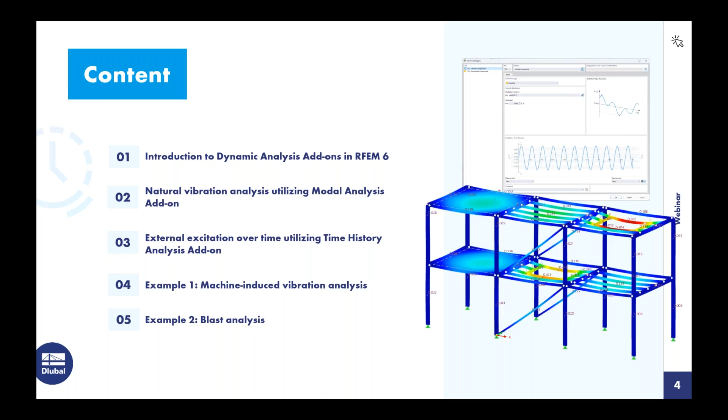So for those of you not familiar with our program configuration, RFEM 6 is the base program that allows us to fully model the structure, where we have access to the materials and cross sections from the various standards. We can load the structure and run a full static analysis. But when you need dynamic analysis capabilities, it will require one of the 4 add-ons listed here.

The first is the modal analysis add-on. So this allows us to calculate the mode shapes of our structures and determine the natural frequencies, periods, and angular frequencies of the structure. So this is a prerequisite for the additional add-ons that you see listed here. The second is a response spectrum analysis. So this is a seismic analysis according to the ASCE 7, the NBC, and other international standards that we offer.

We also have the recently released pushover analysis. This is a nonlinear analysis for seismic deformation behavior, and currently this is according to the N2 method. And finally, we have our linear time history analysis. So this is to introduce external excitations as a function of time. So today we'll be working in both the modal analysis add-on as well as the time history analysis add-on.

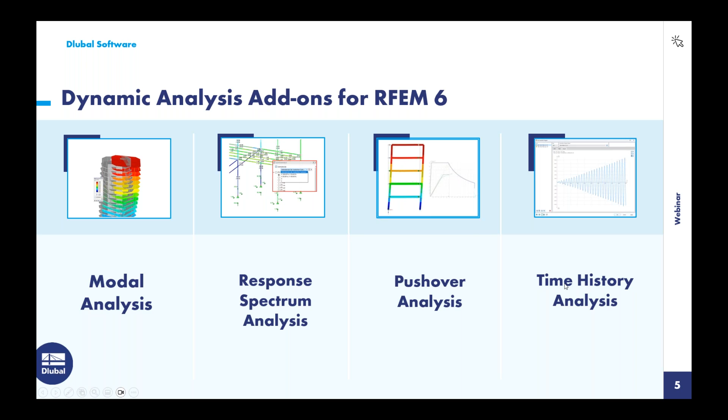So to turn here to the features within the time history analysis, we certainly have improved the integration and the workflow in our new version, RFEM 6. And when we compare this to RFEM 5, it was a little bit of a 2-part process, quite a bit different to open up the dialog box, then to define all of the dynamic time history analysis settings. Now you'll see in RFEM 6 a much more fluent workflow where we can better see that add-on integrated in the main program. We can combine user-defined or function time diagrams with nodal, member, surface, free, and generated loads.

So the point being that we have the ability here to include many different load types in correlation with these time diagrams. We can also combine multiple independent excitation functions for one analysis. We'll see this with our first example today. We do offer the linear implicit Newmark or the linear modal solvers.

And it should be known that currently in the program all nonlinear elements for a time history analysis are going to either be ignored or converted to linear elements. So for example, if you have failure in uplift for a support condition, this will simply be converted to a standard support for that dynamic analysis. Same concept with a nonlinear tension only member. Internally, this will automatically be converted to a truss element. We can consider structural damping with the Rayleigh damping coefficients or the Lehr's damping values.

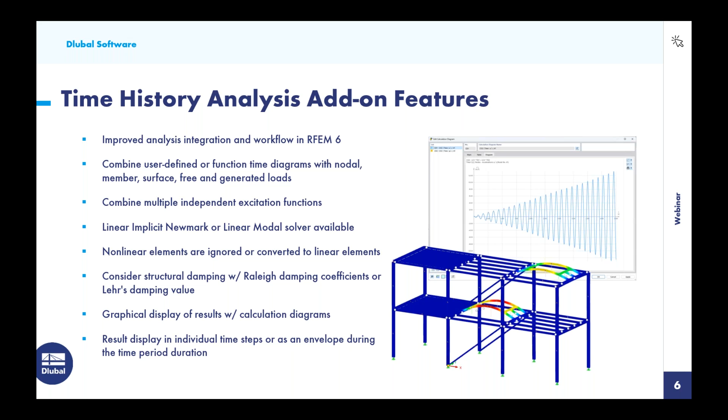So these machines are operating at 325 rotations per minute. The mass of the machine is 2,000 pounds, or converted to 62.16 slugs. The mass of the rotor is going to be 700 pounds, which converts to 21.76 slugs. And the rotor is going to be operating at an eccentricity of 0.75 inches. Therefore, we want to calculate the excitation frequency here.

So we just simply take the 325 rotations per minute, we divide by 60 seconds, and we get a value of 5.42 hertz. So this is a really important number to remember, and will come into play a little bit later on, but just remember this excitation frequency magnitude here. The angular frequency is calculated by simply taking the excitation frequency, multiplying by 2 pi, and we get 34.03 radians per second. And finally, we want to calculate the centrifugal force.

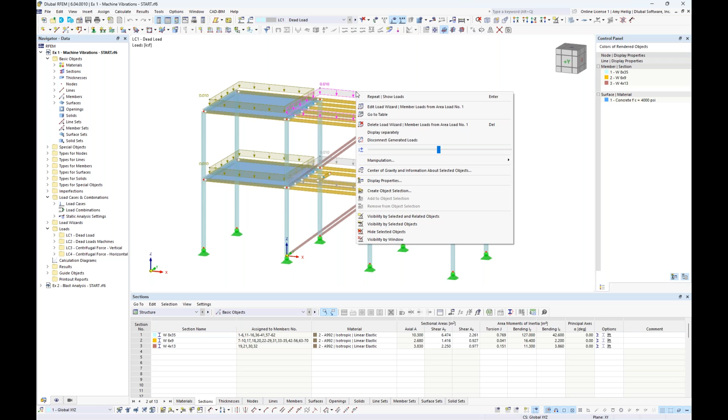So we also have the loads defined. Within the dropdown at the top, I have 4 total load cases at this point in time. We have our dead load, which is automatically going to include self-weight, but notice here that I also have applied an area load. So we have 10 pounds per square foot applied to the structure at both levels. The area load applied over on the right-hand side was used with our load wizard so that we could correctly allocate this to the members based on a one-way area load distribution. So we can right-click to display separately to see those magnitudes here.

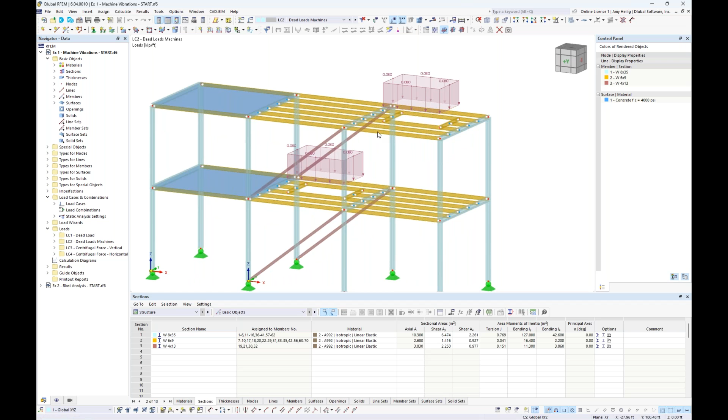Now, in addition to the basic dead load, we also have the dead load from the machine. So this is essentially just the force of the machine sitting on the structure, 0.08 kips per foot. Then going back to the PowerPoint, we have those 2 centrifugal force load cases. So we have load case number 3 here, which is that centrifugal force in the vertical direction. So notice this magnitude 0.047, which again just came directly from the PowerPoint.

If we're curious to know the total length of these members around the opening, we can hold down our control key to select all of these members. You can right click, and under the center of gravity and information, we do see here the total length given to us as 33.6 feet for these selected items.

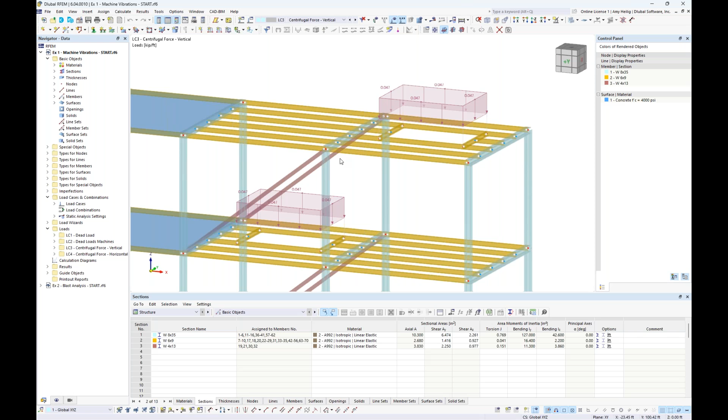So we have the centrifugal force in the vertical direction, and we also have the centrifugal force in the horizontal direction. So identical magnitude here of 0.047, but of course we want it to act in that horizontal position based on the global x-axis here on the structure.

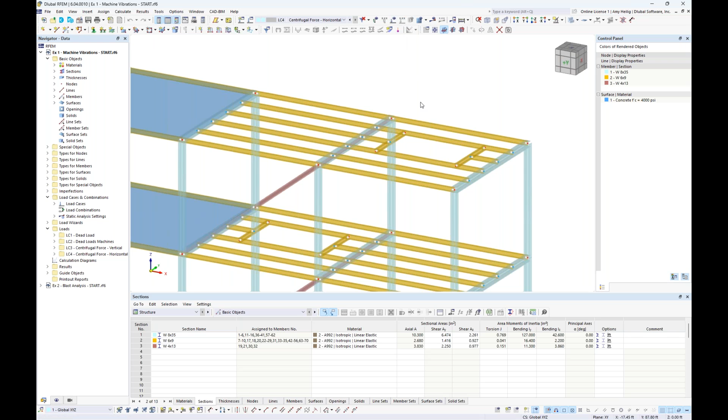So now that we have reviewed the structure as well as the loads, what we would like to move forward with now is our dynamic analysis. And we activate these add-ons by right-clicking here on the model name within the navigator to access our base data. Alternatively, we can launch the base data directly here within our quick tools up at the top.

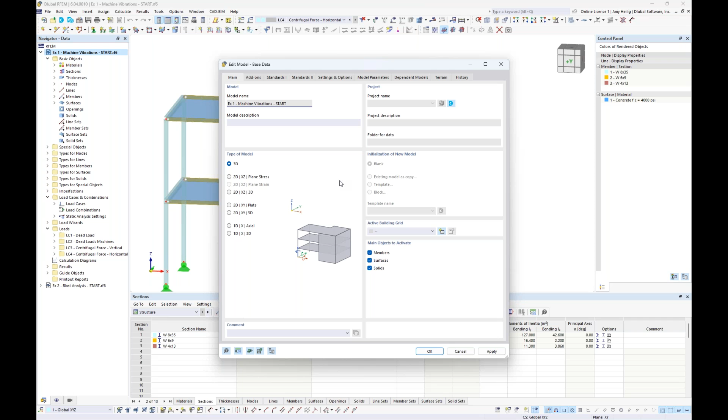So this is the dialog box that would be presented to us when we initially first create the model in RFEM, but we can always access it afterwards as well. Under the second tab here are all of our optional add-ons. So again, RFEM is responsible for the standard static analysis, but we want to activate our dynamic analyses add-ons. And for today, we'll go ahead and turn on the modal analysis and the time history analysis as well.

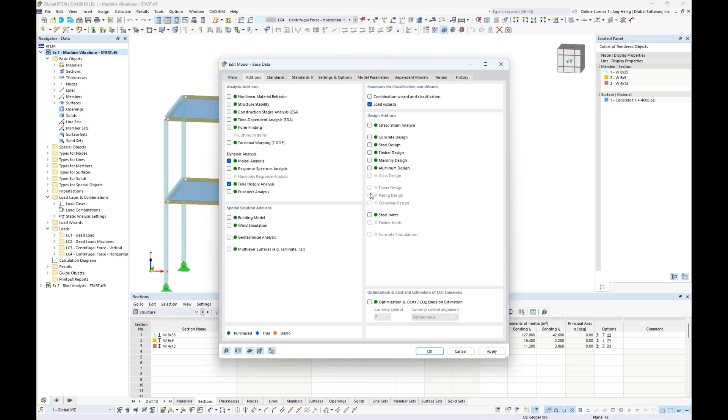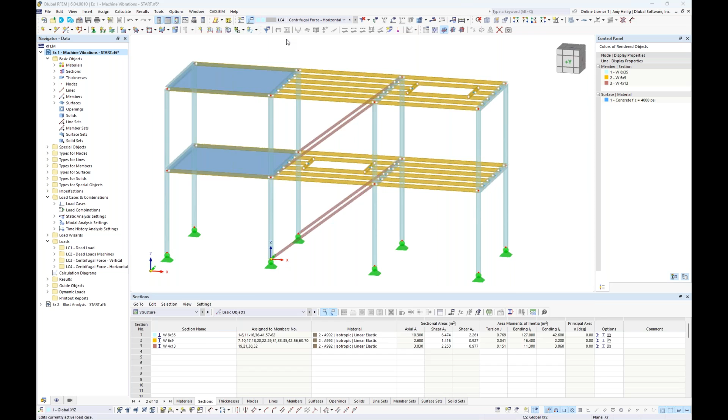So when I click OK, at first glance, it really doesn't appear that much has changed, but we want to move forward now with our modal analysis for this structure to determine what those natural frequencies are, mode shapes, and so on. So we're going to go into our load cases and combinations dialog box. And the initial step that I want to take is under the load combinations. We're going to create a new definition type here.

And in order to carry out the modal analysis, I do need to convert my dead load forces into masses. And I would like to combine the dead load from the structure, so that includes the self-weight, but also that 10 pound per square foot area load, but also take into consideration by adding the dead load of the machines. So both of these will be considered, and we can also rename this one for our mass combination.

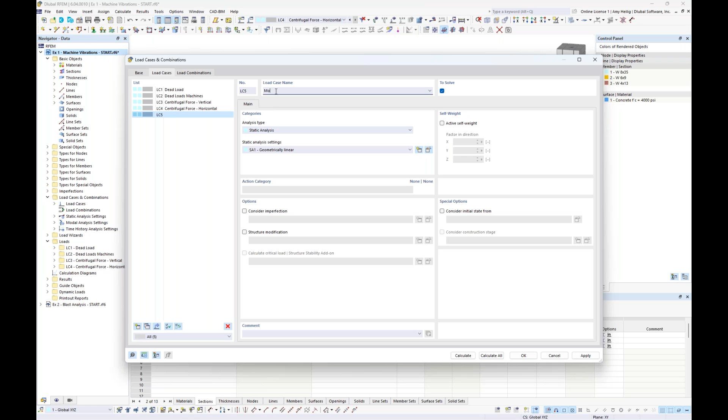So now that we have created this simple mass combination, we go back to our load cases here, and we're going to create a fifth load case. And we're going to give this one the name modal for modal analysis. So rather than carrying out a static analysis, we want to use our dropdown to select modal analysis. And this is available because I've activated this add-on within the base data dialog box.

So here we have some additional settings that we would like to set for the modal analysis in particular. And we do have two default options here. So you could either modify these default options, or you could create your own definition type down here in the lower left corner. For today, I'm going to increase the number of modes to a total of 15 for my calculation.

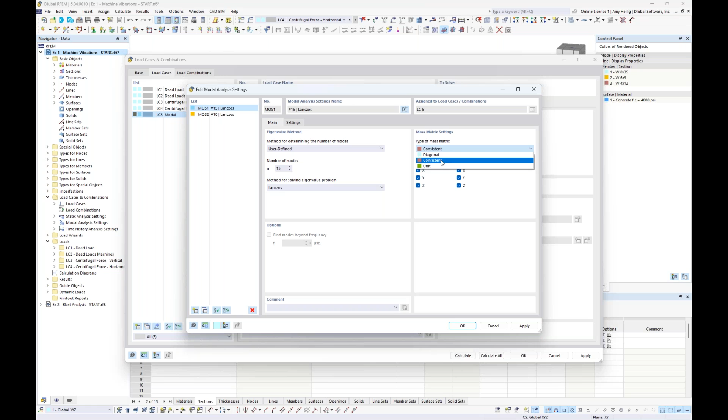We'll carry out the eigenvalue problem according to the Lanczos solver, and we're going to utilize a consistent mass matrix here, taking into consideration the mass in the translational X, Y, and Z directions, as well as rotational about the X, Y, and Z axes.

Under the settings, this is just the program converting those forces to masses. So we're going to take all Z components of the load, convert them to masses. We do have the ability to neglect masses as well, but we will not make any modifications to that. We'll just leave that as default with no neglection for now. The import masses allows us to choose that mass combination that we have created, considering both the dead load of the structure and the dead load of the machine.

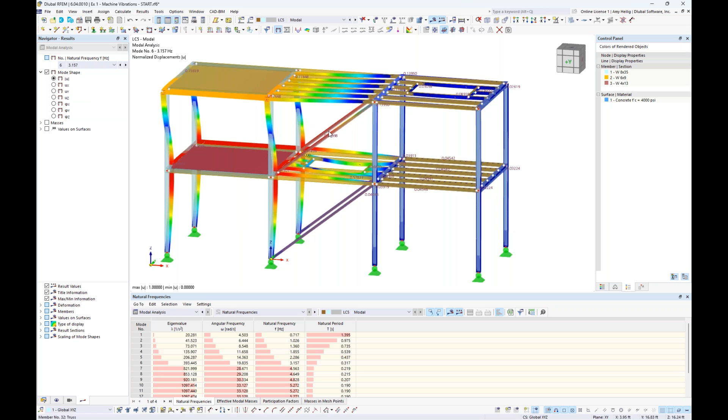So now that we have input in all of this information, we can run our calculation. So the program will quickly run through this modal analysis, calculating a total of 15 different mode shapes. And once the calculation is done, you'll notice that we get a fourth tab over here in our navigator where we can use our drop down here to select one of the 15 different mode shapes that we have solved for. And everything will sync up graphically here to show us our relevant shape.

But also we have the same information available to us here in the drop down within the table. So we can select the modal analysis. And again, those 15 different mode shapes are going to be shown that we can cycle through graphically within the table format. Now for each of these mode shapes, we also see the relevant angular frequency, the natural frequency, and the natural period.

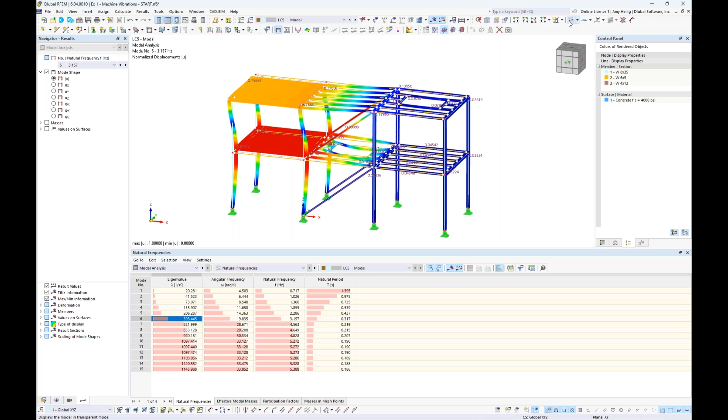So it's also important to take a look at the effective modal masses tab. So this tells us our mass participation for each one of these mode shapes, but also the total mass participation down here at the bottom for all 15 mode shapes combined. And we'd like to determine what are our dominant mode shapes for this modal analysis.

So taking a look at mode shape number 1, we can see that this one has the most mass participation in the Y direction. So this is certainly a dominant mode in the Y direction. We take a look a bit further down, it looks like mode shape number 8 would be our dominant mode in the vertical direction or the Z direction.

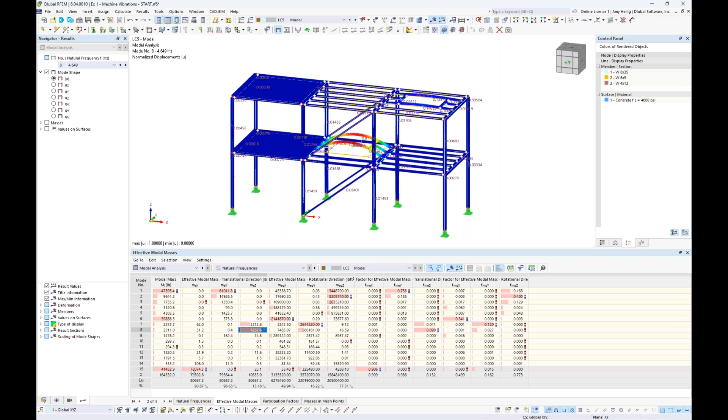Pretty relatively low mass participation though in this direction of only 13%. And then finally, further down, mode shape number 15. So this is our dominant mode here in the X direction. We have a total mass participation of 90.87%.

So keeping mode shape number 15 in mind, we go back to the natural frequencies tab, and what you'll see here is a natural frequency value of our structure of 5.388. So this is in hertz, and if you remember back to the PowerPoint, I had mentioned to keep this value in mind. And you'll notice that these two magnitudes are very close together. So this should immediately tell us that we're inducing these excitations with an excitation frequency that's very similar to the structure itself, that we need to carry out a time history analysis.

And ultimately, we're trying to avoid what we call resonance. So most of you are probably familiar with this term, but it's essentially a phenomenon that occurs when a structure is subjected to an external force or vibration, in our case today, these rotating machines, that's of similar magnitude to its natural frequency. And this typically results in an amplification of the vibration.

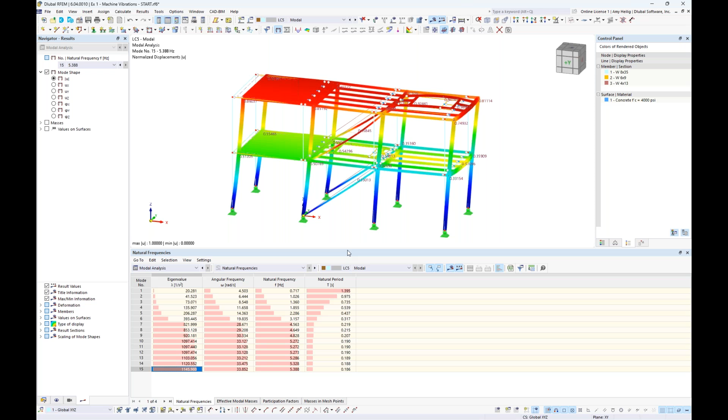So going back to RFEM and knowing that these two frequencies coincide, we'll now move forward from the modal analysis to the time history analysis. So we'll begin with the time diagram. Going back to the first tab here of my navigator, you'll notice that we have a new folder available to us under dynamic loads. And this is only available because I've activated that time history analysis add-on. And we see here where we can create our first time diagram definition type.

So we'll go ahead and click on this, and the dialog box opens where we can input either a user-defined time diagram, which you can see in table format. We can put in the time and we can put in the multiplier, essentially telling the program how this force is going to vary over time on the structure. Now, alternatively, we have the function option, which is what we'll be utilizing for this first example. We can go ahead and rename this time diagram if we would like as well.

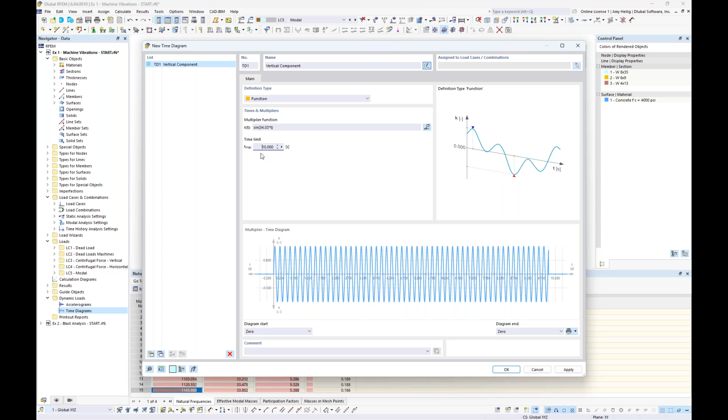So I'll call this one vertical component, and the multiplier function would now be input as a sine function. So remember, we have these rotating machines, therefore we want to represent this as a sine function where we input the sine of the angular frequency, which is 34.03 directly from our PowerPoint, and we multiply it by the time parameter. We'll go ahead and close these parentheses. We set the total time limit here to 10 seconds, which is just default. And we see our diagram populate visually at the bottom of this dialog box.

We then want to make a copy of this time diagram, and we're going to rename this one to horizontal component. Very similar multiplier function here with the sine of the angular frequency, but if you also remember back to the PowerPoint, we have this pi over 2 phase shift that's occurring between the horizontal and the vertical force. Therefore, in order to account for this directly in the formula, we will add 1.57 to account for pi over 2. Again, 10 seconds is adequate. So if I hold down my control key and I zoom in here with my mouse wheel, we can see this diagram in a bit more detail.

So for the horizontal component, you'll notice that at time equals 0, we essentially have 100% of that load acting on the structure. But as we move to a time duration around 0.04, we're going to have 0% of that horizontal load acting on the structure. Now, if we toggle to the vertical component, what we should see here is exactly opposite. At time equals 0, we have 0% of the vertical load. And at time equals 0.04, we have 100% of that load acting on the structure.

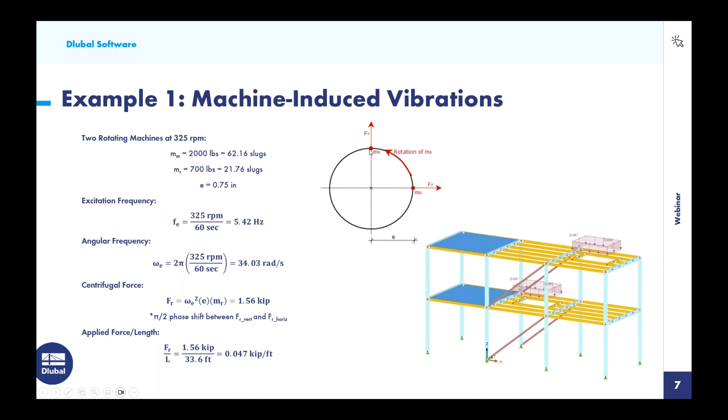So this all just goes back to this simple diagram in the PowerPoint, trying to represent these centrifugal forces as a function of one another. That again, we have 100% of the force acting in the horizontal direction, but at a phase shift of pi over 2, we want to in turn change this so that 100% of the vertical load is acting on the structure. So these time diagrams just relate these static centrifugal forces to one another and how they're going to vary over time.

So now that the time diagrams are available over here in our navigator, we want to go back to the load cases and combinations, where under the load combinations tab, we're going to create a new definition type here, and we can give this one a name of time history analysis. The analysis type is not static analysis, but rather time history analysis, available in our dropdown.

And very similar to the modal analysis, we just need to input a few settings here. So we'll go into the default definition that's available to us, and notice that we have two options here for our analysis method, either the linear modal or the linear implicit Newmark. So we will be moving forward with the linear modal for this first example.

And this is certainly a more precise, quick, and recommended path forward for the analysis method if the structure has a low number of modes that have been calculated with the modal analysis add-on. This is also assuming that we have sufficient mass participation as well. But underneath the hood, that multi-degree of freedom system is going to be broken down into many single degree of freedom systems, and the solution of that decoupled system is then going to be calculated with the implicit Newmark solver.

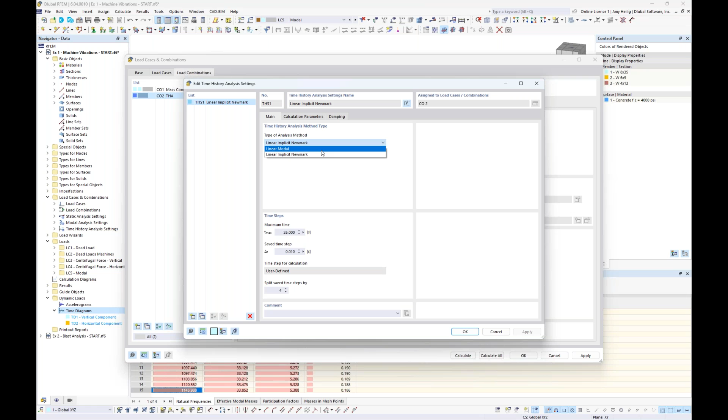Now, alternatively, if we choose here the linear implicit Newmark solver, this is a direct time integration method where small time steps are needed for an accurate calculation. You should know, though, you do not need a modal analysis. So that's not required here, in contrast to the linear modal, where we always have to carry out that modal analysis. This is recommended for complex structures requiring a high number of modes in order to achieve that mass participation. So again, in our case today, we'll move forward with the linear modal.

Now, the maximum time is the total time duration that I would like to consider for this time history analysis. And for our example today, we will choose 5 seconds. The save time step is the number of steps you would like to export back into RFEM to view the results. So obviously we don't want to set this too small because it's just going to take the program a lot longer to populate all of those results. So we'll leave this as 0.01.

Now, the split save time steps is going to further divide the save time steps, but this is what's actually used in the calculation itself. So I'm going to further divide this by 10 so that technically with the actual calculation, I'm calculating every 0.001 seconds, but I'm only going to export 0.01 seconds for my results.

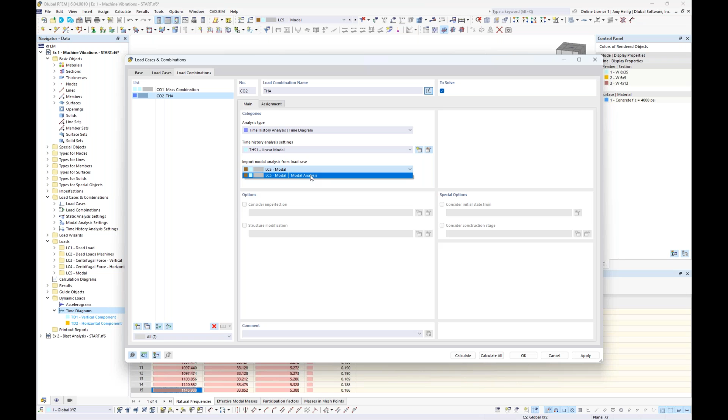Okay, so once these settings are complete, we are going to import the modal analysis because that is required for this solver. We only have one modal analysis available in the model, so that's what's selected in the dropdown. And finally, we need to relate those static loads. So if you remember, we have both load case 3 and load case 4 for those centrifugal forces in the vertical and horizontal direction acting at these openings. And we need to relate them to the time diagram. So how are these loads going to vary over time?

And the first centrifugal force in the vertical direction is, of course, going to be related to my time diagram in the vertical direction. But for my centrifugal force in the horizontal, we want to set this to the time diagram in the horizontal direction as well.

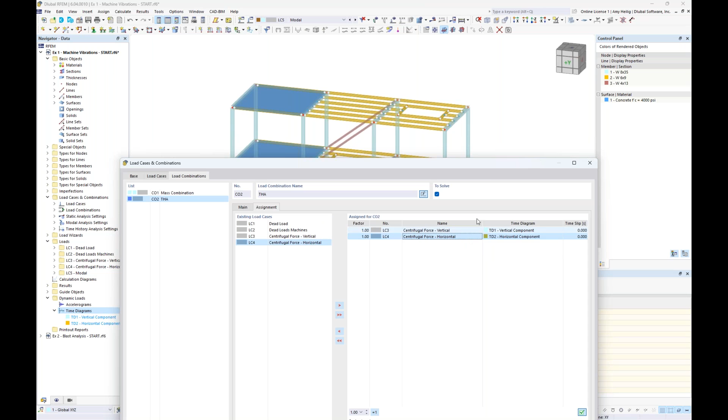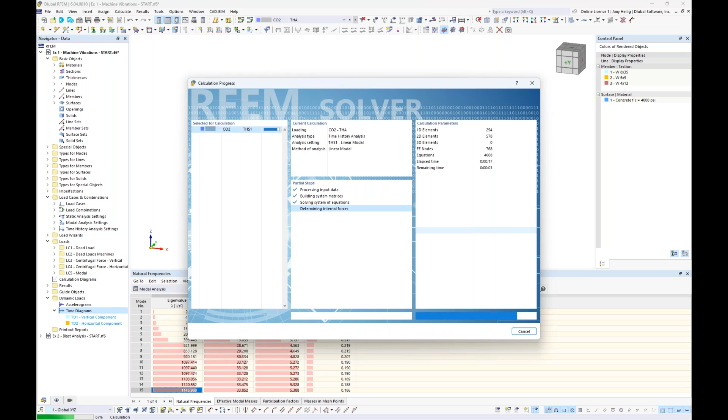So now that we have set the static load cases to the relevant time diagram, we would like to run this calculation. Now we don't need to rerun the modal analysis. The program has already solved for this. Our results are saved here. And then we move on to the time history analysis, taking into consideration the full 5 seconds of how these rotating machines will be directly applied to the structure. So once this is done solving, we are presented yet again with our results directly within our navigator on the left for time history analysis, as well as in our table, we see time history analysis available here as well.

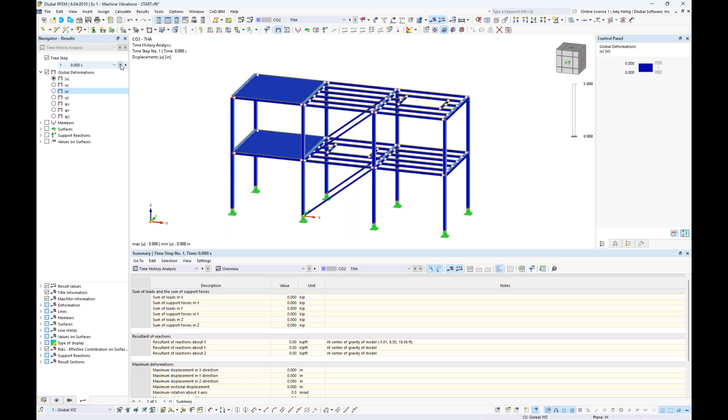So initially you'll notice that the program allows us to view, let's say, the global deformations of the structure based on the relevant time step. So currently at time step 0, nothing's going on with the structure here in terms of the deformation. But as we continue to cycle through these time steps, that's where we start to see the relevant deformed shape based on those centrifugal forces acting on the structure.

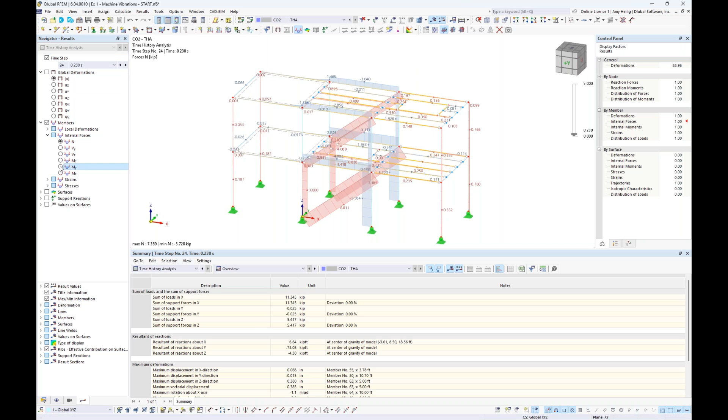And the same concept is available for other result information like our member internal forces. So for example, we can view the axial forces at this particular time step, or we can view bending moments, or perhaps we want to view the shear forces. Surface internal force information is available, and also support reactions. So we can turn those on again for this particular time step.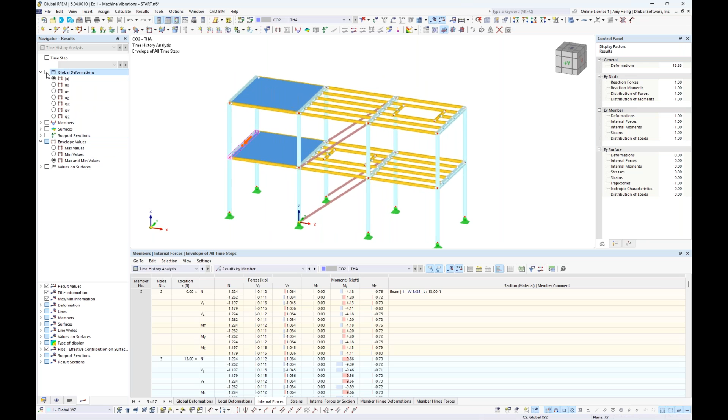So this is for each individual time step, but if we're rather interested in an envelope solution for the full 5-second duration, we can just simply turn off this checkbox. So now the program is going to give us our results here over the total time duration. So we can turn on, for example, the global deformations.

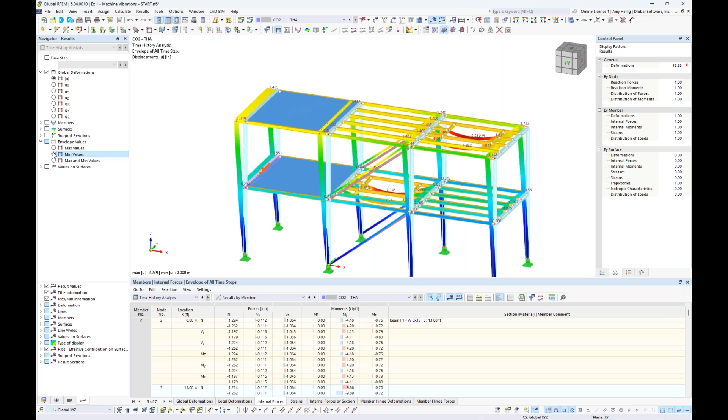And if we look graphically, we're seeing 2 deflected shapes here. And this is just simply because you'll notice under the envelope results that both the max and the min values are currently turned on. If we're interested in only the max deflection, we can toggle to this, maybe only the min deflection. Same concept for our member internal forces. So for example, if we take a look at max and min for our axial forces, you're going to see both of these values displayed on the member, but we could certainly toggle to any one of those other options.

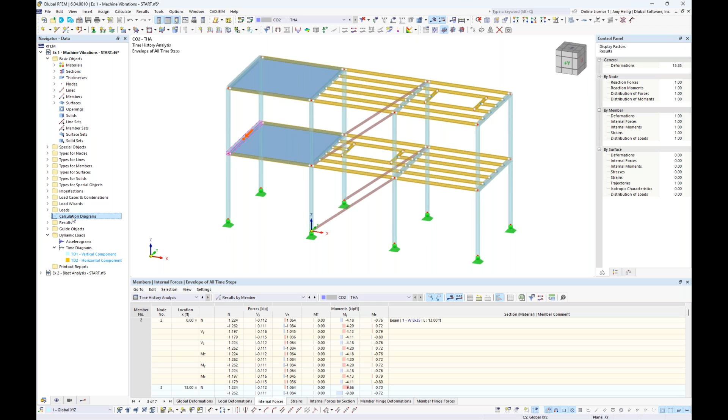Now, all of this information shown graphically is certainly very helpful, as well as in table format, but I do want to go back to the navigator here to discuss the calculation diagram. So I'll go ahead and collapse some of these folders, and you'll notice the calculation diagrams is available here directly within the navigator list. And this is going to be highly used for any time history analysis. So this is going to give us more information about the structure's behavior over the total time duration.

So under the first definition type here for my calculation diagram, we want to toggle this to a time history analysis. Now, the program is automatically going to display a diagram here based on the max deformation. But notice within this dropdown that we really have a lot of different options to choose from, including nodes for the global deformation, maybe want to view the accelerations on the nodes or member internal forces.

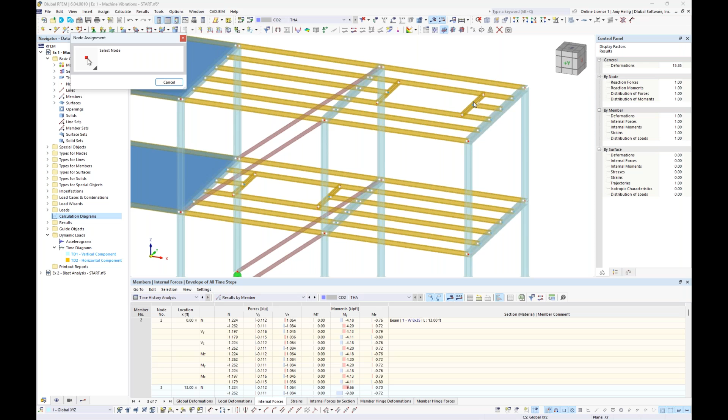So I'm going to start here with the global deformations of the nodes, and I'm going to pick this particular node up here at the opening where one of my machines is sitting. And currently the value shown here under this second dropdown is going to be the total deformation, considering all three directions, X, Y, and Z. But instead, I'm going to view the deformation in the X direction only.

And when we take a look at this, we can clearly see that resonance is an issue, that this deformation in the X direction is just continuing to grow as time goes on. And likely if we were to expand the total time for a time history analysis, it would just continue to grow. We see here a value of 1.4 inches.

So if we toggle instead to something like our acceleration on this node, and we want acceleration in the global X direction, again, the diagram looks very similar. So if we take a look at the total magnitude here of this acceleration at the end of the 5 seconds, it's 141 feet per second squared. So this is certainly not an acceptable value.

And when we're interested in what are some of the recommended acceleration limits, there's plenty of resources out there. If we take a look at AISC Design Guide 11, for example, it really depends on what your structure is going to be used for. Something like an office is going to have a much lower tolerance value for acceleration versus something like a gym.

But somewhere at the low end, it should be around 0.5% G, and somewhere at the higher end of acceptable tolerance values here is 5% to 10% G. But in any rate, we are far over that with this particular structure. So we need to make some modifications.

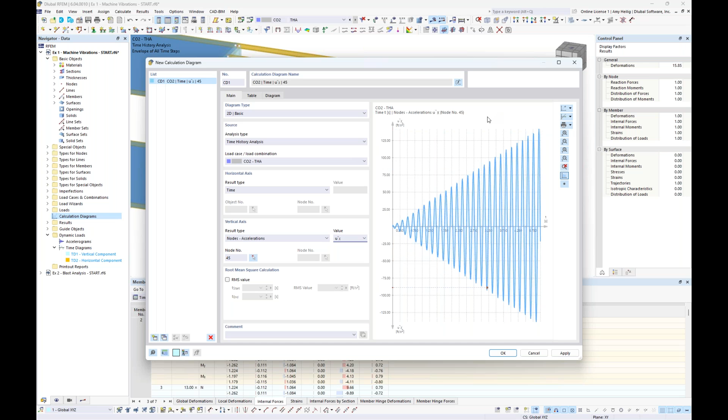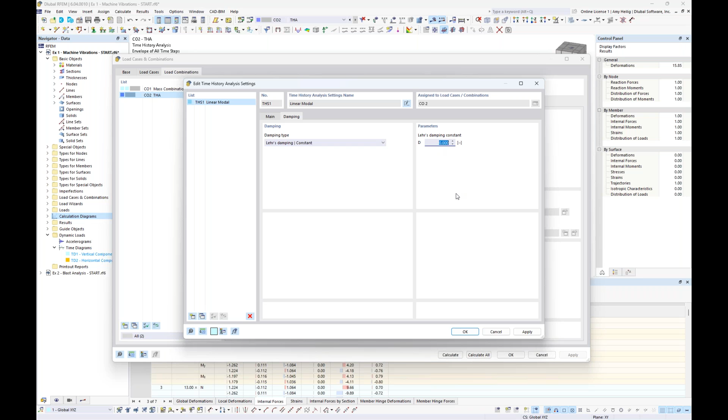And the first thing that I would suggest doing is to consider damping. So we'll go back to the load combination here and that time history analysis. We've already been within these settings before under the damping. So this time we want to consider using our dropdown, the Lehr's damping constant. So for this particular steel structure, we'll go ahead and set this at 0.02. So we'll click OK. The program tells us we need to delete our results and rerun the calculation.

Now, nothing changed with the modal analysis. We should see the same results there. But now with this time history analysis, we've introduced the damping matrix in consideration with the dynamic analysis. So we should see slightly different results here now that we're considering damping.

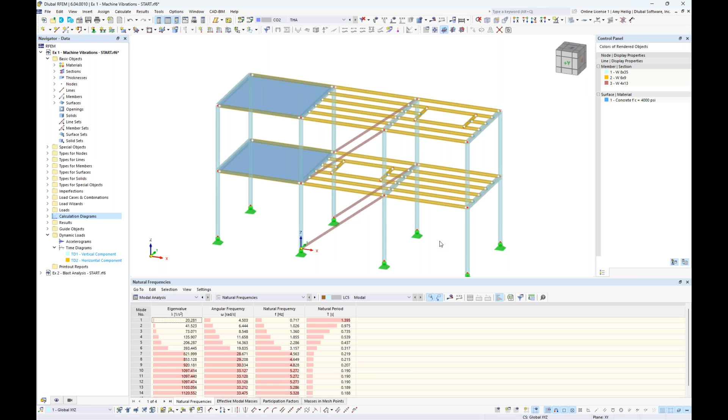So now that this is finished, we will immediately go back to that calculation diagram. So we can see it listed here in our navigator. We don't need to redefine it. It's already been saved. We're currently looking at the acceleration of node number 45 in the X direction, and our diagram certainly looks slightly different. We're not seeing maybe those accelerations growing linearly, but rather leveling off.

If we take a look at the total magnitude of the acceleration, it is around 40.79 feet per second squared. So this is probably still an issue. The acceleration is far too high. So we need to continue to make additional modifications to this structure.

Well, the obvious choice would be to change out some different cross sections here. Maybe we can modify the cross sections, which will in turn affect the stiffness, and our modal analysis may output different natural frequencies now that don't necessarily match the rotating machine. So we can do this directly with the cross sections listed. So for example, these diagonal braces, W4x13, we could simply double click and exchange out to a different W section. But the question might be, well, do we go with a cross section that is bigger? Do we go with a cross section that's smaller? And we could certainly trial and error and keep running through these different calculations.

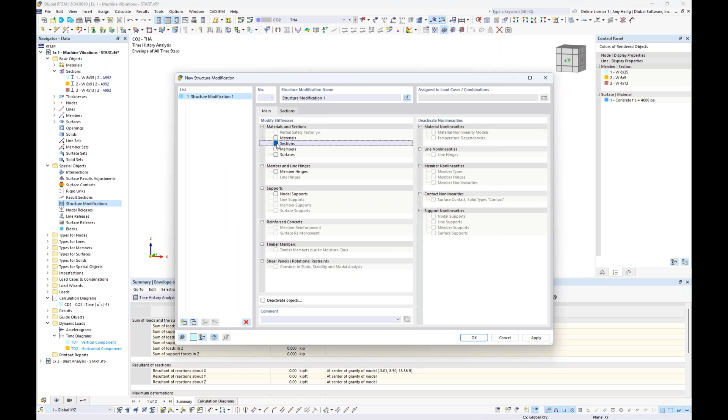But I'd like to show you a different method, which is available under the special objects folder. It is called the structure modifications. And we can go ahead and double click to create our first structure modification where we activate the sections option. And we get a new tab here under sections with our 3 different W sections, including the W4x13 for those diagonal braces.

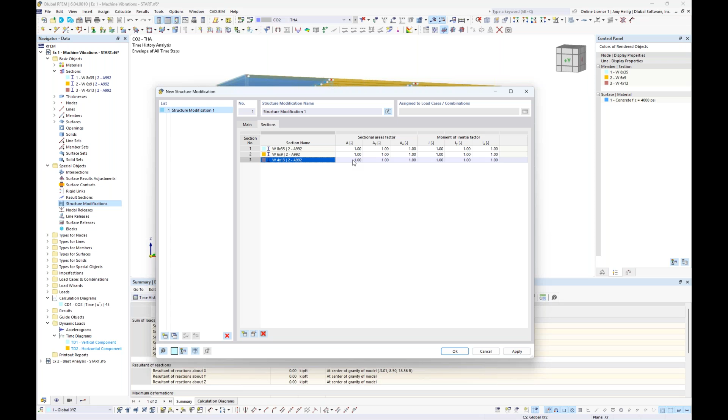And we have the ability to directly apply a factor to the cross-sectional area, which in turn is going to increase or decrease the axial stiffness of the member used in the calculations. So rather than exchanging out the cross-section, we can just more or less play around with the stiffness properties directly to see how our structure is affected.

So under the W4x13, the first thing I want to do actually here is to give it a name. We'll call this one double stiffness, and the area factor will be set to 2.0. The area in the Y is also set to 2.0, and area in the Z is 2.0. So again, just increasing the stiffness twice the amount here.

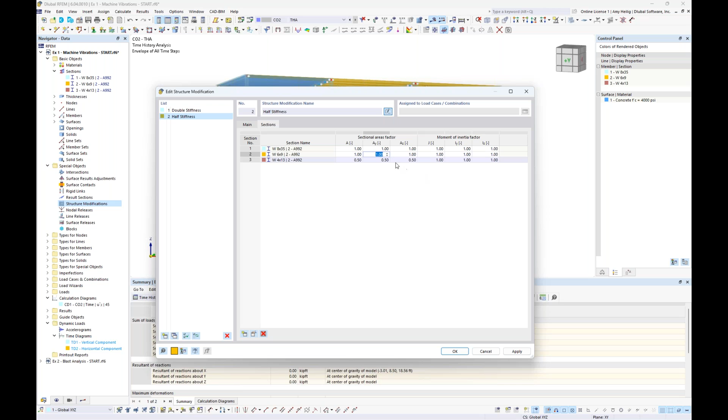Now we're going to make a copy of this structure modification, and we'll call this one half stiffness. So in this scenario, instead of applying a factor of 2.0, we'll apply a factor of 0.5, just to again see how the structure responds to maybe a smaller cross section without actually swapping out those cross sections quite yet.

So now that we have these structure modifications shown here, we can go back into our load cases and combinations. Under the load cases, remember we have our modal analysis with no structure modification sets, just originally the results that we have already looked at. But I'm going to make a copy here, and I'm going to call this one double for double stiffness. Under the structure modification, we can turn on that definition for double stiffness that we just created. Again, where we're going to increase the axial stiffness times 2 for these diagonal braces.

I'm going to make an additional copy here, and we're going to rename this copy half so that we can activate here half the stiffness for the diagonal braces. Well, it's not just enough to do it for the modal analysis, but we also need to apply this to the time history analysis. So again, I can simply create a copy here, and with our original time history analysis, we will first rename it, but notice that with the linear modal, we can now import in the modal analysis where we have increased the stiffness by 2.

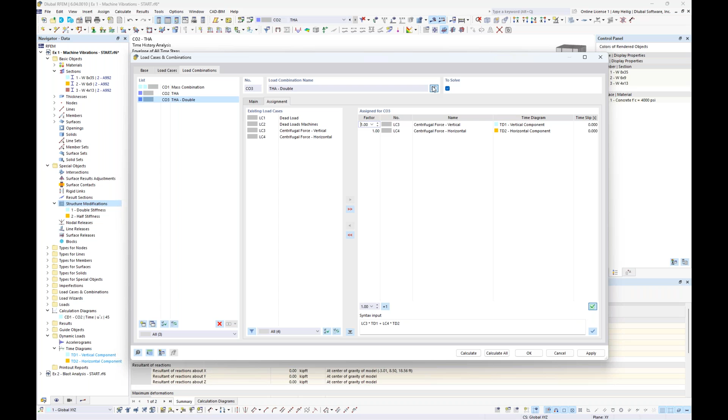The program automatically detects that we also want to apply this structure modification to the time history analysis, because remember we have these static load cases that vary over time. So we need to also apply that stiffness modification to this scenario here. And we make an additional copy, and in a similar manner, we call this one half, and we're going to import in the modal analysis with half the stiffness set. And then you can see here the structure modification half stiffness is also set for the time history analysis.

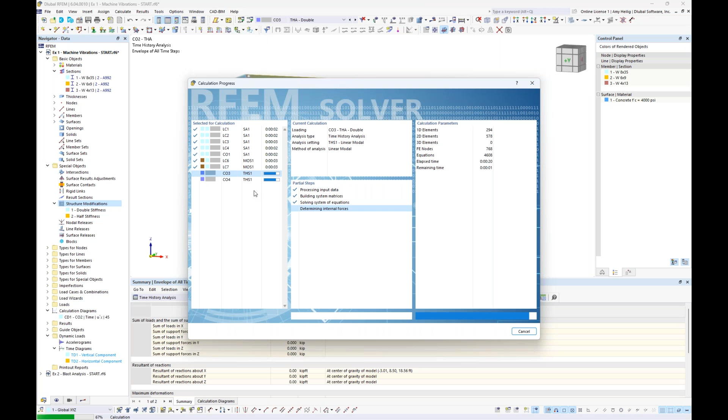Okay, so now that these are run with the relevant stiffness properties or modifications set, we can just go ahead and click calculate all. So this is going to cycle through first my load cases here, which is fine. We're not really concerned with them. But then you'll also notice that the program is going to go ahead and calculate both of those modal analyses with the stiffness modification set, and then we're now running through both time history analyses with the additional stiffness modifications.

So the first thing that I'll go to now that the calculation is done is those calculation diagrams. So we'll go ahead and double click on here, and we see the same calculation diagram, but that's fine because we're still referencing that original time history analysis with the same cross section, same stiffness, nothing changed.

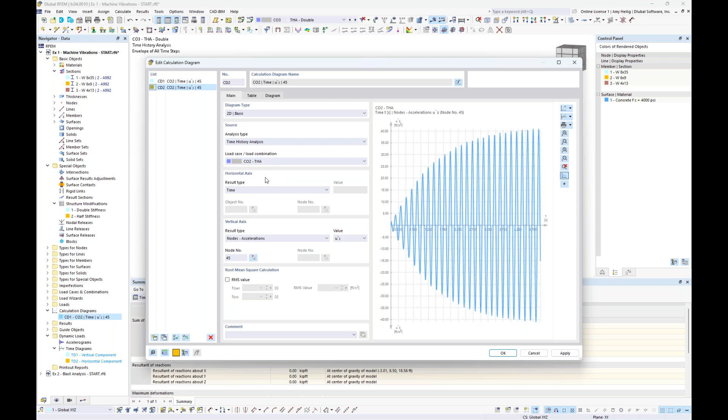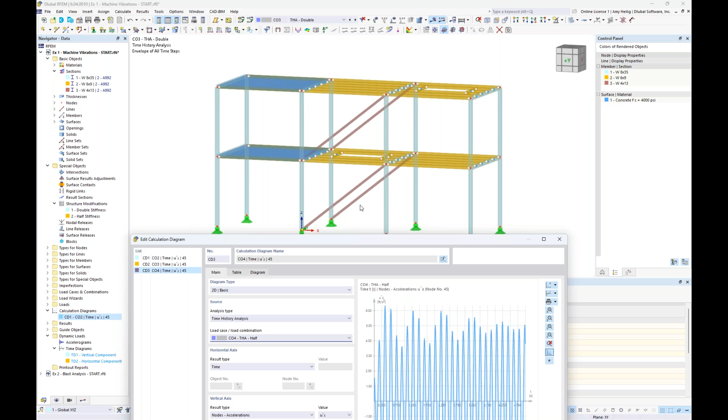Perhaps we make an additional copy here to select half the stiffness. Again, resonance is no longer an issue. So we don't necessarily always have to increase the cross-section size. Even decreasing a cross-section size may allow you to overcome issues like resonance. However, we do need to still take a look at the total acceleration values, a little bit higher here, around 4 to 5 feet per second squared.

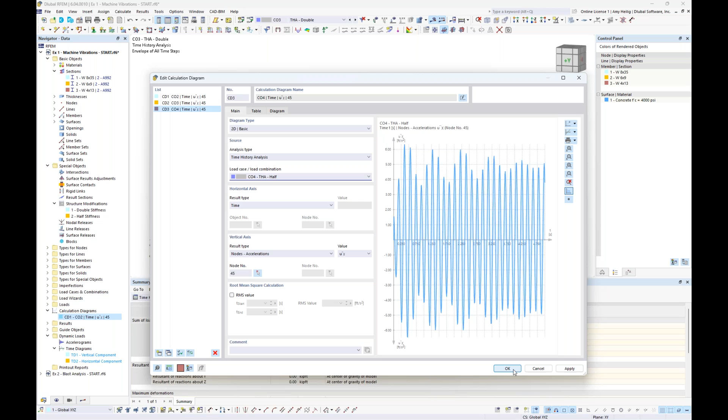So it'd be up to you as an engineer to determine, okay, is this within the allowable range, or do we need to make further modifications? But once we have an idea about the general stiffness options based on those factors, then we can go in and make modifications to that W shape. Okay, so that will conclude our first example today with these induced vibrations on the structure.

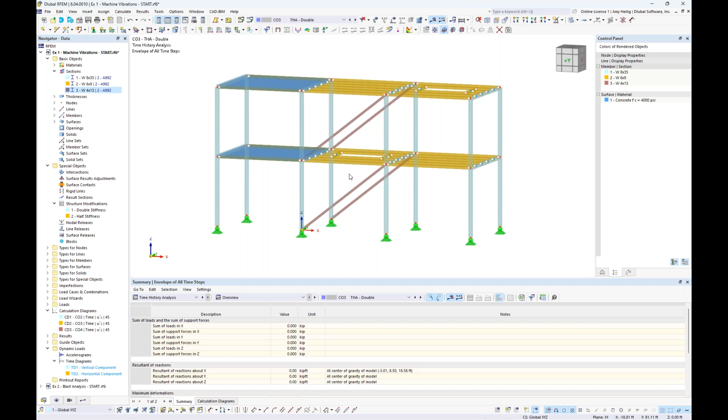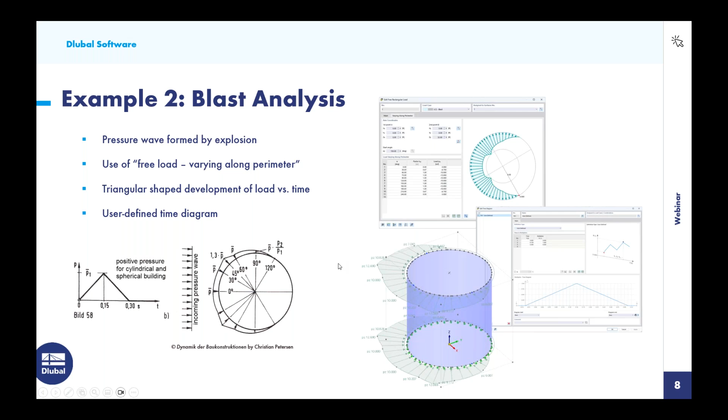So let us go into the RFEM model directly, where we'll go ahead and toggle to this open model here. So you'll notice that for this very simple example today, we have a 32-foot high cylindrical structure, 33 feet in diameter. Really consists of a single surface here. And if we take a look at the thicknesses, it's going to be A36 material, 2 inches thick. Also, we have a pin support down here at the bottom that is applied as a line support.

We also have the loading applied. So we have 2 simple load cases for this example. We have the self-weight, which no additional loads are applied to the structure, just internally that self-weight is considered within this load case automatically. But then we also have that blast load. So this comes from the PowerPoint and the reference mentioned, where we wanted to vary this load around the perimeter.

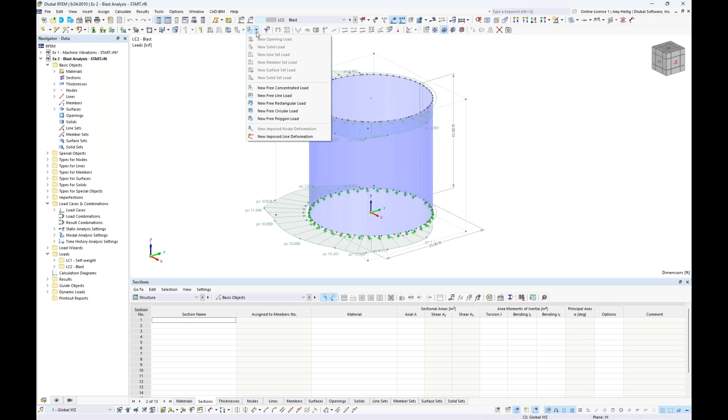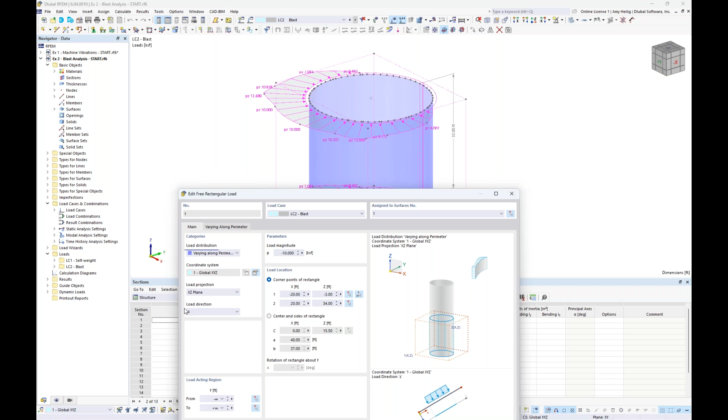And we take advantage here of what we call a new free rectangular load. So with the free rectangular load, if I go ahead and double click on the options here, you'll notice that the load distribution can be set to varying along perimeter. And I also wanted the load to act normal to the face of the surface. So this is based on the local z-axis of the surface itself. We also need to input in here a reference load magnitude, so -10 kips per square foot.

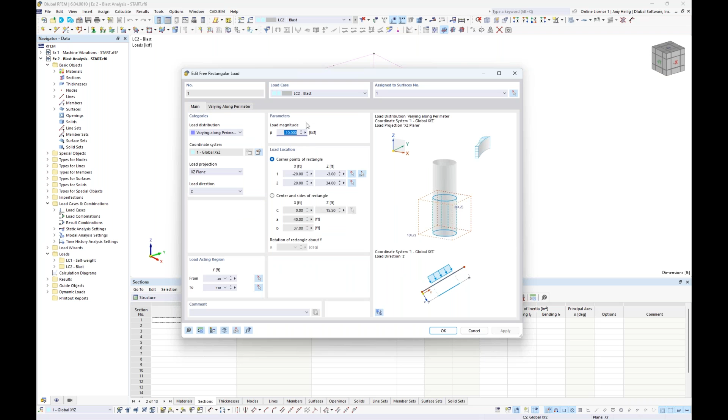So taking a look now at the second tab that is available, we see in table format where we can input in degrees. So this first column, 0 degrees, 30 degrees, 60 degrees, and so on. We can also input the relevant factor. So again, this just comes from the PowerPoint, and then the program will automatically take this load magnitude here and the parameter set in this table to calculate the total load acting on the structure and how it should vary, again, as we kind of move around the perimeter. So that's a little bit about just the basic static load that is applied here as a general load case.

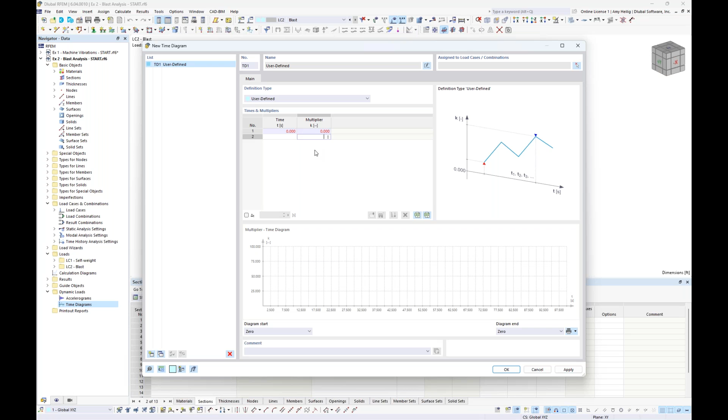Now, we want to define that time diagram. So I will go into my navigator over on the left in the dynamic loads folder, where very similar to the last example, we just double click here the time diagram. And this time, instead of using the function, we want to set this to user defined. And for a very simple application today, at time equals 0, we want a multiplier of 0. At time equals 0.15, again, just referencing the PowerPoint, we want the multiplier to be 1. And then finally, at time 0.3, we would like the multiplier to be 0.

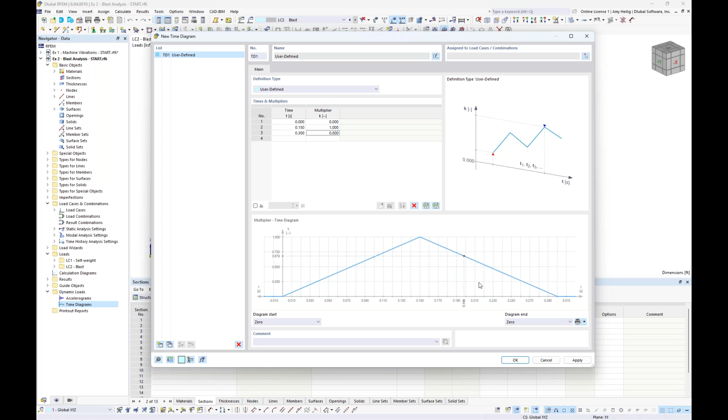So we see this triangular shape displayed here that will be used to tell the program how this static pressure load that's shown here in the background is going to vary over time. So a very quick impulse, so to speak. So we have this single time diagram defined. So we click OK, we see that listed over here in our navigator. And we want to go into the load cases and combinations.

So I will preface that for this particular time history analysis, I'm going to run a linear implicit Newmark solver. So this is in contrast to the linear modal solver. What this means is that I don't need to run a modal analysis. So everything that we saw in the first example, that modal analysis was required because we were running the modal solver. And unless we're interested in determining what the structure's natural frequencies are, periods, mode shapes, and so on, we really don't need to run the modal analysis calculation here in the load cases for a linear implicit Newmark solver. So immediately we jump to the load combinations instead.

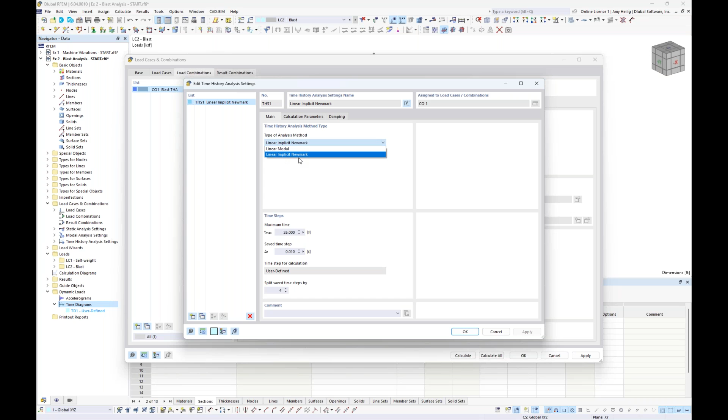We create our first definition type here. And the load combination name can be set. We will call this one blast time history analysis. You'll see here that the analysis type is set to time history analysis rather than static. And very similar to our last example, we have our settings. Now, the type of analysis method here is set to linear implicit Newmark. The total maximum time is going to be 1 second. So typically with a blast analysis, we don't need to carry out the time history analysis over a long duration of time just because that load impulse is so quick. So 1 second should be adequate here.

The save time step will be set at 0.01. And then we further want to split the save time step here by 10. So remember that this is the value that's actually used here within the calculation. So we'll technically be using 0.001 for this linear implicit Newmark calculation, but we're going to export out every 0.01 seconds into RFEM to view those results graphically.

Under the calculation parameters, because we are not running that modal analysis, you'll also see here just some additional settings specific to the mass matrix for the linear Newmark solver. The type of mass matrix will be set to consistent, for example, acting in the translation directions as well as rotation about those global axes. And then we also have the same mass conversion type, similar to what we saw in the modal analysis in example 1.

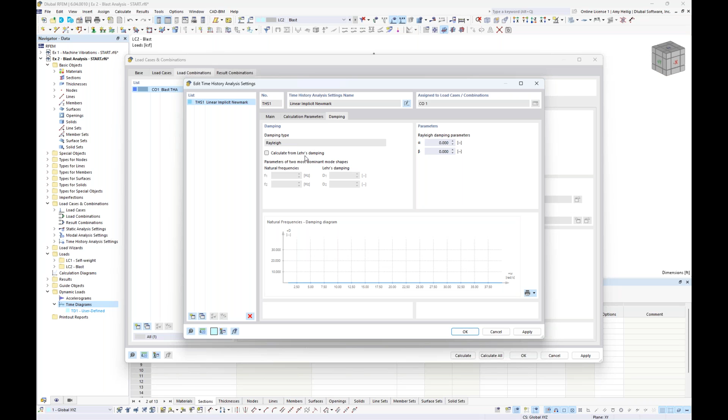And finally, we have the damping. So for this example, I'm not going to consider damping, but it's worth pointing out again, remember that with the Newmark solver, we only have the ability to define Rayleigh, or we can allow the program to convert from Lehr's damping. Again, we'll leave all of these values as 0.

So we need to import in the masses from either a load case or a load combination. We don't have any mass combinations that we created for this example. Rather, I'm just going to import in the masses from self-weight alone, and that's available within this first load case.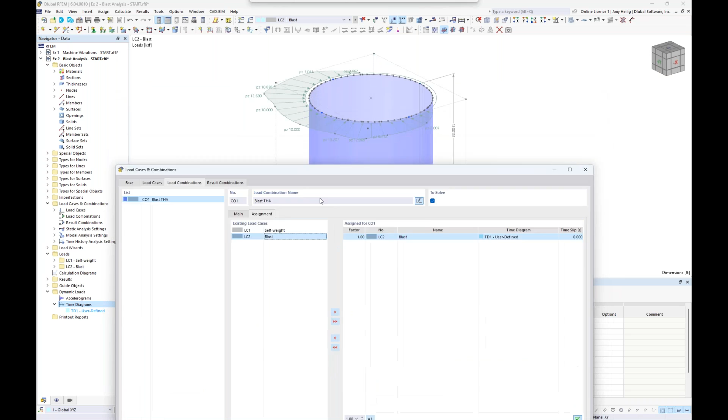And finally, we have the assignment tab where we take this blast load, and we can see it displayed on the structure here as a standard static load. And we relate this to the user-defined time diagram. And that was that triangular development of load versus time, which is automatically set here because we only have one time diagram defined now in the model.

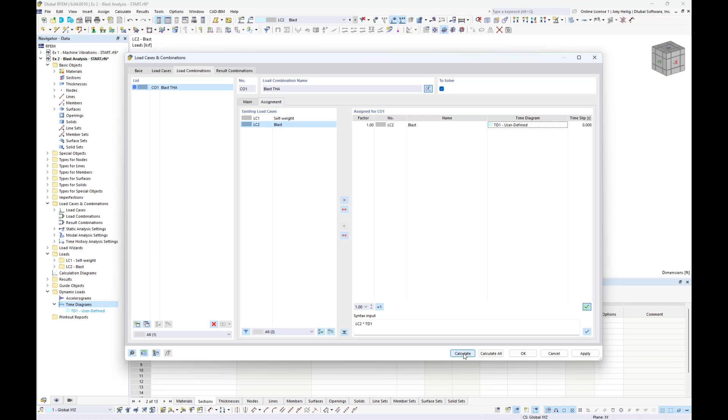Okay, so now that these are set and correlated, how this pressure is going to vary over time, we are going to run the calculation. It should be known that we're not running through the modal analysis, but rather directly to that time history analysis. With the Newmark solver, it does take just a little bit longer.

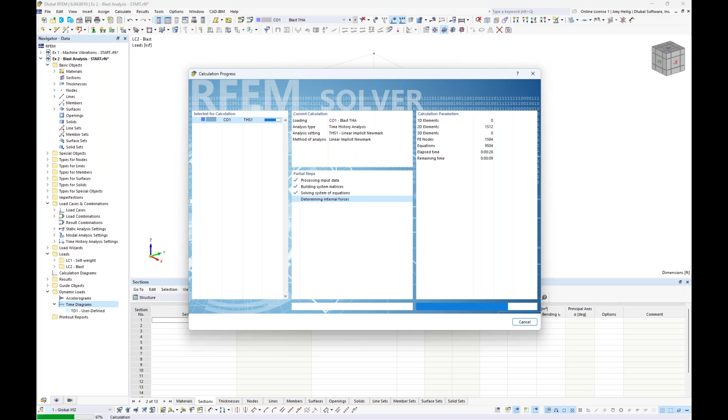And I had mentioned that when we were talking about the modal solver, it is a bit quicker, it's more precise, but can only be used when we have adequate mass participation and we're carrying out that modal analysis with a relatively low number of mode shapes. But regardless, we'll carry out the time history analysis here for the full 1 second duration.

And once those results are done solving, we see them presented here back in RFEM. So we'll go ahead and turn off the display of our loads. So you'll notice initially we have the time history analysis available in the navigator, same concept for the table, just like what we saw in example 1. And if we toggle to the time duration of 0 seconds, as we would expect, that pressure wave has not been applied to the structure yet.

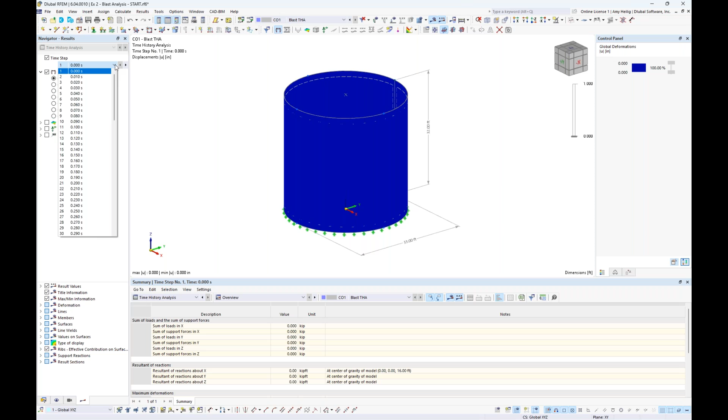But if we cycle down here and choose time equals 0.15 seconds, this should be the highest global deformation of the structure because that's 100% of that pressure wave being applied. And then as we cycle through these additional time steps further out, we're going to see that deformation slowly decrease because we're going to apply less and less of that pressure on the structure.

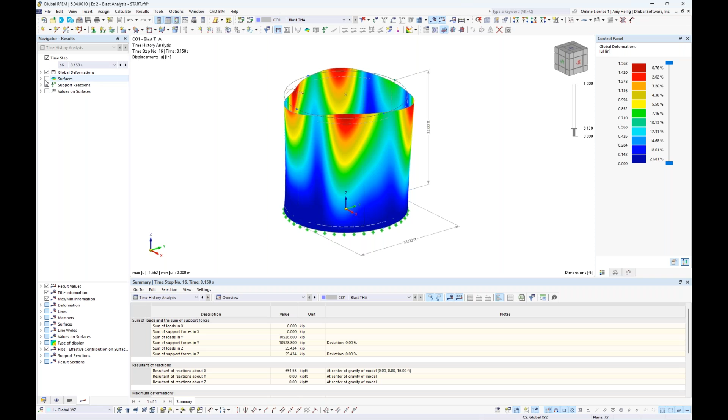We also can view information, if we back up here to 0.15 seconds, such as the surface stresses. So we can activate here the stresses. Maybe we're interested in the von Mises stresses. So we find that under the equivalent stresses here, we can activate von Mises, and we can see this graphically within the structure. Now, this is all for this particular time step.

So again, keep in mind if you're interested in an envelope solution, let's say showing the maximum von Mises stresses, we would just need to simply turn off this checkbox. This is going to show us, based on what we have set here under the envelope value, either the max or the min von Mises stresses over the full 1 second duration.

So again, we want to turn back to our initial navigator here to access our calculation diagrams. So we'll create a new calculation diagram here, and we're going to activate the time history analysis. We only have one time history analysis under the load combinations available. Notice that the program automatically defaults here to this first option, showing us the maximum deformation of the entire structure over that 1 second time period.

And exactly as we would expect, what we see here is the max deformation around time 0.15 seconds until that load dissipates based on the time diagram that we have defined. We also can take a look at not necessarily just the global deformations of the structure, but we can choose specific nodes to view those global deformations, accelerations, and so on.

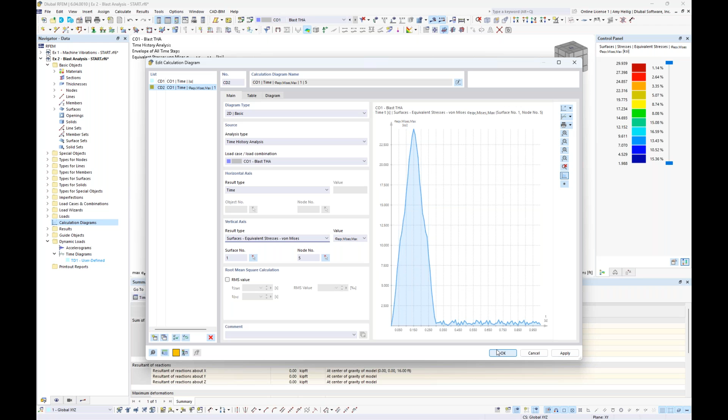Okay, so that should give us just a very quick example of a blast analysis and how we can also utilize the time history analysis add-ons. The final thing that I just want to quickly point out is we might be wondering, how do we combine the results of our time history analysis with additional load cases or additional load combinations?

So you'll notice back under the base data, first of all, I haven't generated any load combinations automatically to the standard, but you could certainly turn this on here with this checkbox and select the ASCE 7 or the NBC. For today, everything was code independent, but what I did turn on was the result combinations, and we get this additional tab here, and we can also activate what we call sub results.

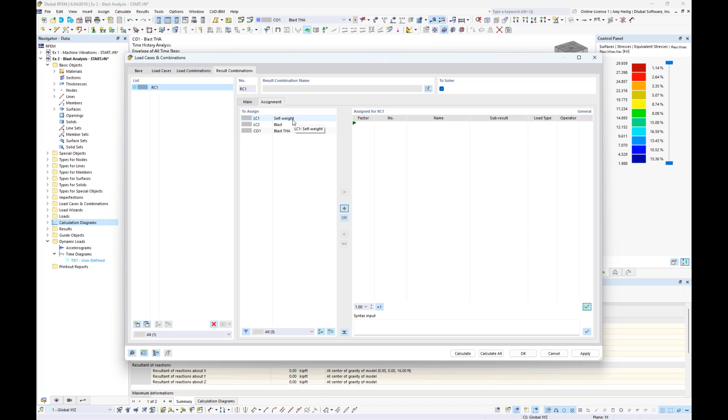So now with the result combination, I create a new definition type, and this allows me to combine any load case or load combination with those dynamic analysis results. So for example, if I wanted to combine self-weight with the time history analysis from the blast, we can go ahead and do so by moving both of those over here on the right.

Now, it should be known that these are linearly combined because we take the results of load case 1 and we add them to the results of this time history analysis. So everything is done linearly. The load type can be set here to permanent, so if we always want self-weight acting, same concept for the time history analysis. Transient just means it is alternatively acting in order to give us the worst case scenario or envelope solution here.

The sub results option that we checked under the base tab here allows me to choose a particular time step. So for example, if I choose time step number 16, these results will then be combined with self-weight. Alternatively, if I'm interested in an envelope solution, I could choose this option all, so that the envelope results of the max and min are combined with the self-weight. And we can create multiple result combinations here, combining different time steps.

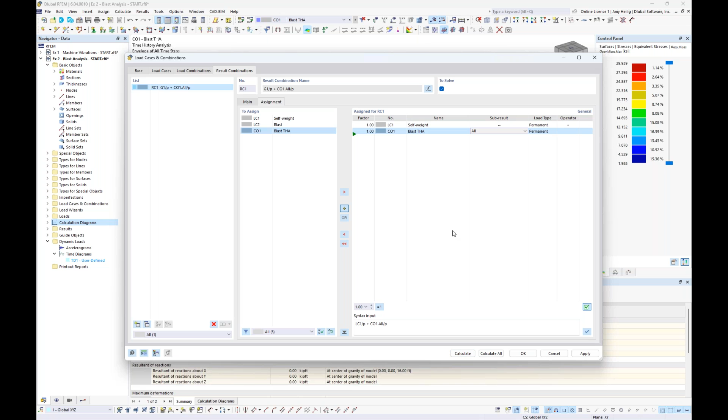We can rerun these calculations down here at the lower right-hand corner, and then we can view our results just like what we've seen up until this point.